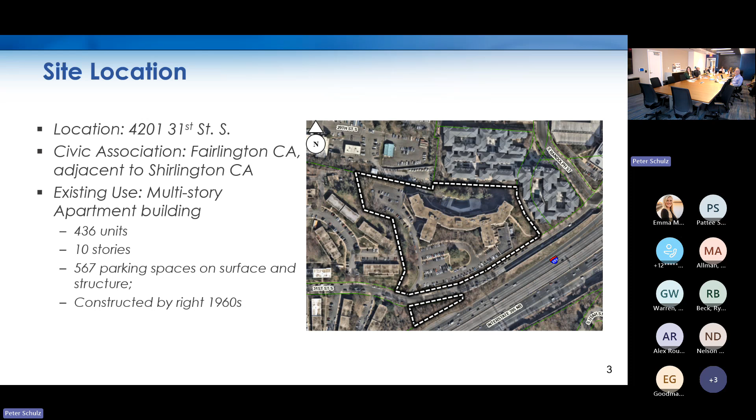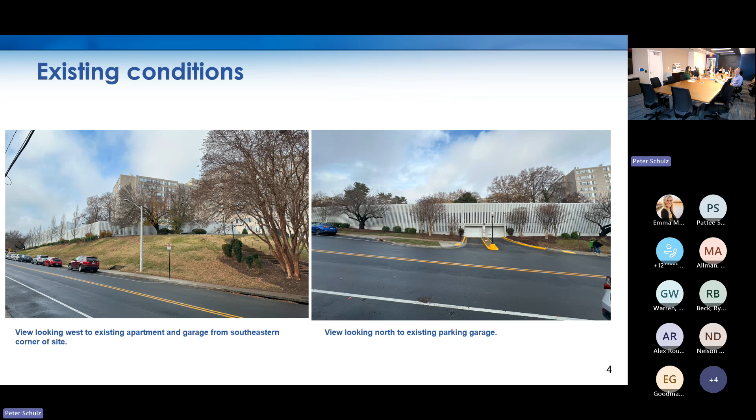Just so we're all familiar, the site location is in Shirlington. It's located in the Fairlington Civic Association boundary area, though it is neighboring the Shirlington PDSP area. It's a 10-story apartment building built around 1963 with over 400 units, so considerably sized, and it has surface and garage parking. Briefly, existing conditions show the above-ground parking garage. It was built by right, so it didn't have site plan or architectural control, or the usual amenities we expect through site plans like undergrounded utilities, wider sidewalks, and street trees.

So it met the minimum requirements for the zoning of the day and the engineering requirements. The applicant is asking for a site plan to build new units. The existing building is going to stay the same. The garage is going to stay.

The applicant wants to build one building of 59 units and 7 sort of, we're trying to figure out how to call them, duplex, 2-unit side by side, so maybe 4-plex apartments that will go in front of the garage and kind of mask the garage.

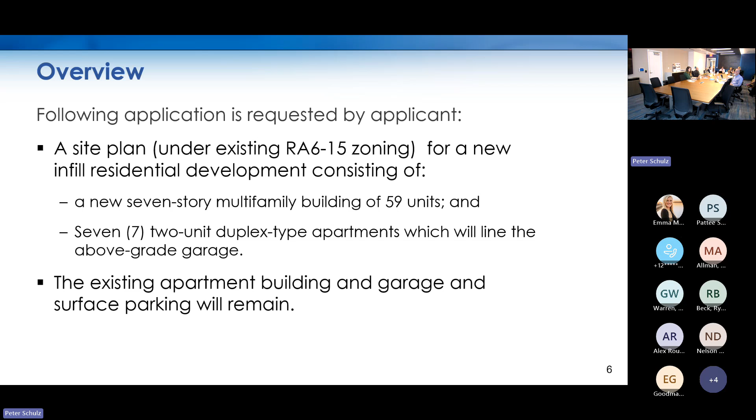The applicant will go into further detail, I will not go into huge detail about this, but it is below the zoning requirements for height. The parking actually does meet the parking requirements of the zoning ordinance, although there are more compact parking spaces than normally, that is an existing condition. So they're asking for a modification to sort of bring that existing condition up.

With a modification, we just kind of acknowledge that those compact spaces are there. Although they will, as they say, restripe some of the surface parking spaces to make more of them full-size parking spaces.

They are applying, I want the SPRC to know that the reason this is a site plan is they're applying through a provision in our zoning ordinance for on-site affordable housing and other amenities. Right now they are at their maximum density for the RA6-15 zoning district. So basically all the 73 new units are earned through the provision of on-site affordable housing and any other amenities that we might identify. Mostly it's going to be on-site affordable housing.

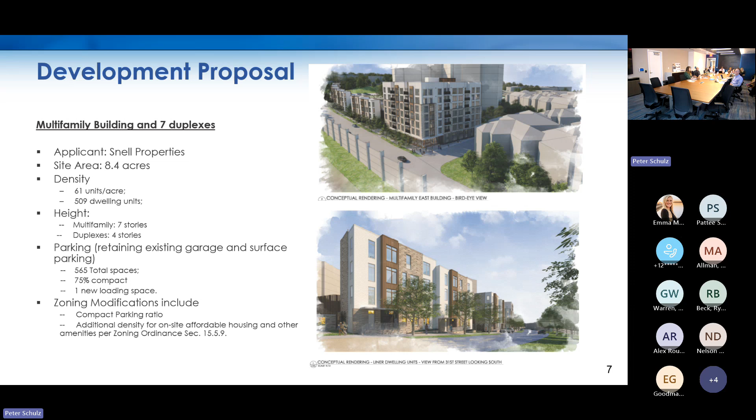The policy guidance we have here, this area is not within the Shirlington phased development site plan area, so it is not under any of the planning documents we have for Shirlington. The only really specific thing is it is within the housing conservation district.

The county board adopted a policy framework to preserve MARKs up to 80% AMI and provide committed affordable housing. The idea is also to preserve the existing and encourage infill development, while ensuring that projects are compatible to their surroundings and that new density can be supported by the transportation infrastructure and transit. It also encourages creation of underrepresented housing forms. This is a policy that the county board adopted that we will mainly be analyzing this through.

There's also the zoning regulations, the RA6-15 zoning district. That's an apartment zoning district, doesn't allow mixed use, except under extremely limited circumstances. So this is going to be purely residential development. And then there's the general land use plan, which shows our future plan for the area, and again, that's apartments.

We had online engagement, 130 respondents, including many people who sounded like existing apartment residents, though we didn't have a specific category for that, reading their comments. Most people said they didn't want to add density. They cited traffic and schools in that area, and concern about loss of street parking. As we've gone through this process, the developer and staff are working on preserving as much street parking as possible.

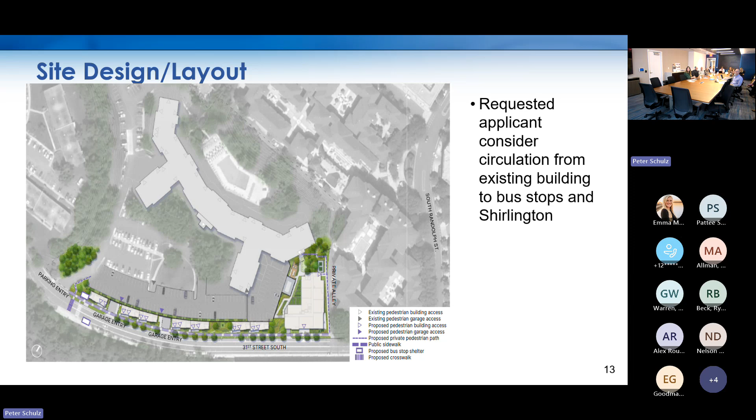Those of you who are on the walking tour saw that the 7-story building is going to be on the easternmost side of the site, closest to Shirlington. The 4-story townhouses are going to be lining the existing garage on 31st Street South. Again, they will show you most of this. The lobby is at the extreme corner of 31st Street.

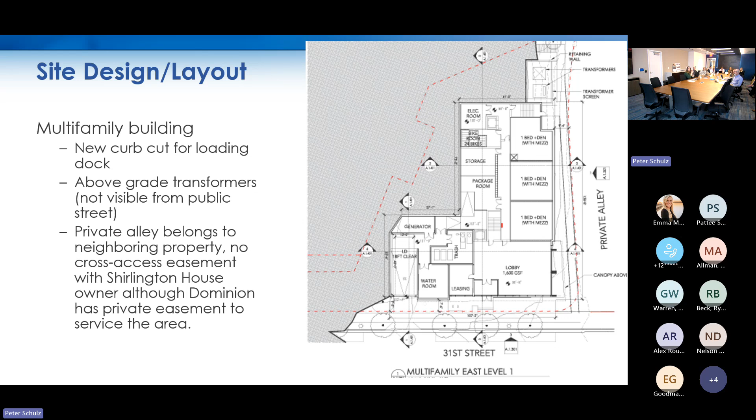In the alley, there's going to be a new loading dock for the new building that will come off of 31st Street. And here's the paired townhouses. So there's one at the far western end that's just 2 units, and these pairs are actually 4 units.

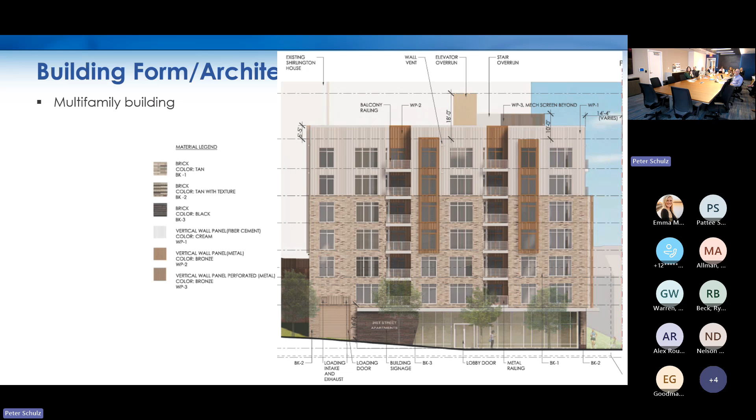And the developer will walk you through the architecture, more generally contemporary. The idea was to try to be compatible with the existing building's vocabulary of architecture. And then this is where I'm going to end. We'll talk about parking in the second half of the meeting.

Thank you. So Matt, are you giving the staff presentation? Yes. Great, thank you.

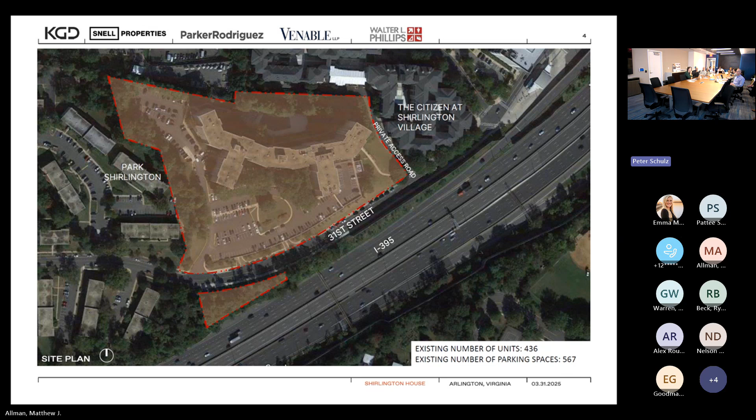Here's our rendered site plan showing how the infill units relate to the site. I'll move left to right and hit a few points, but we'll talk a lot about this entrance and this curb bump out that's proposed, which has implications for a lot of different aspects of the project. You see the liner units as you move up 31st Street, helping screen views of that garage, and then ultimately the multifamily building here at the northeast corner.

That multifamily building is 7 stories, and the liner buildings are 4 stories each. We have a slide a bit later that shows how it looks in relation to one another, because for anyone who's been out there, it's quite a slope, so not all stories are on the same level. Again, it's a 100% residential project, no retail, no commercial use.

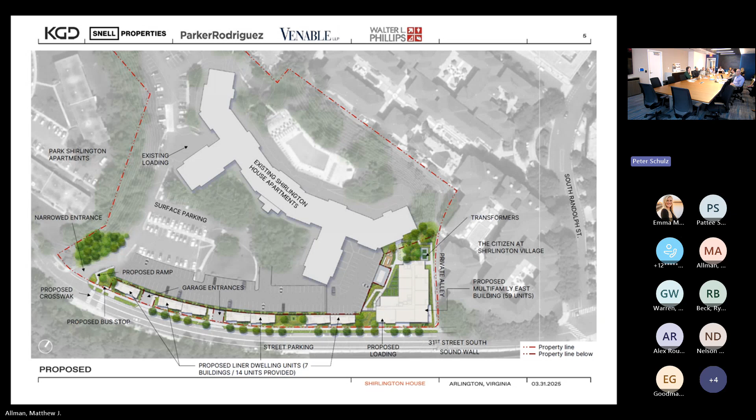This slide is more just for frame of reference for anyone who wants to come back and learn a bit more about the unit mix and sizes. I won't go through every data point, other than to call out the high number of 2 and 3 bedroom units, 13 2-bed and 18 3-bedroom units. That's something unique we're able to accomplish here with the liner units. It's a unique typology that we don't get to do in every site plan project, so it's a real benefit. It makes this project a little special and different from what we sometimes do in the commercial corridors.

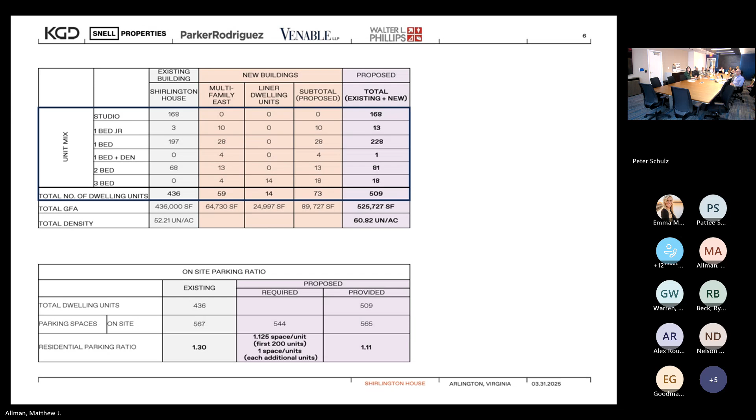In terms of parking, as Peter mentioned, we're proposing to maintain the existing garage in its current condition, just letting the new residents utilize it. The garage is so overbuilt that in the current condition and in the future condition, we still exceed the minimum by-right requirement, which is also kind of unusual. Normally we come to the SPRC and the Planning Commission asking for a reduction, but in this instance, we don't actually need one.

This is the existing site circulation pattern, and I'll again work left to right. You have a primary vehicular entrance here at the southwest corner of the site. This is where vehicles would come to get to the main entrance, or a pedestrian might walk to get up to the main entrance. This is also where trash, loading, and other service vehicles would access the site, and there's a service area tucked back up the hill behind this wing of the building.

Moving down 31st Street, there's a bus stop on either side of 31st and a crosswalk roughly in between. There are two more vehicular entrances into the garage, and they actually take you right into each one at a different level of the garage, because the slope is so extreme that this entrance is to the G1 level, and by the time you get down here, you're actually at the G2 level of the garage.

There's street parking on either side of the street. On the north side of 31st, it is not zone regulated, not metered, just open for anyone. On the south side of the street, it's metered, and the metering continues all the way up the slope, and really off the slide here, all the way up to the bus depot.

At the northeast corner of the site, there is a sidewalk that traverses from one of the secondary building access points all the way down the public sidewalk. We'll show you how that's being reconfigured in the proposed condition, coming up on the next slide. There's also a few entry points down into the garage from that upper deck level.

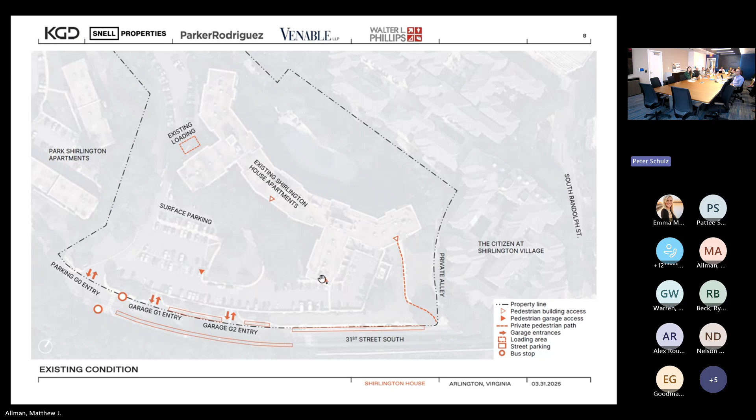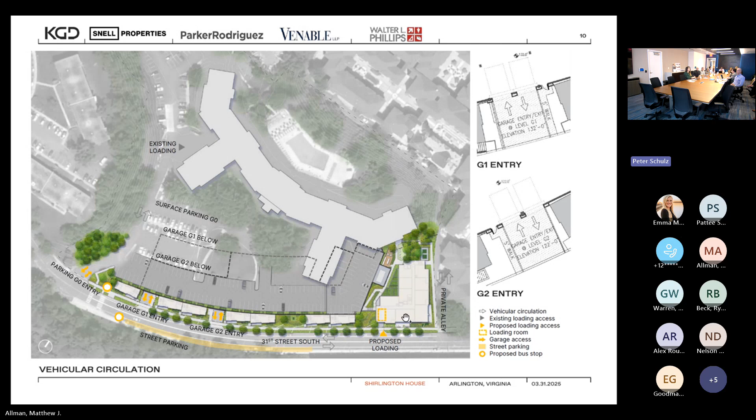This slide is busy—this is the bike circulation. The existing garage has bike rooms today, but to accommodate new tenants they need to be expanded, and in some instances we need additional bike parking. On the top side of this image, the light blue shows existing spaces, the dark blue shows the new ones, and roughly how you might get to these spaces once you're in the garage.

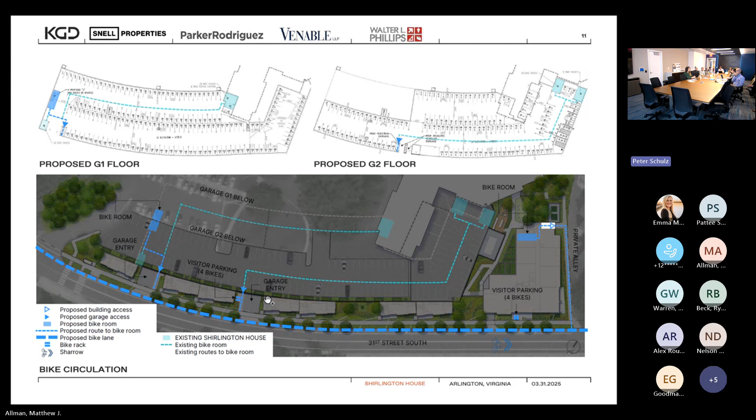On the bottom side is a little more public-facing. The thick dashed blue line is a new 5-foot bike lane that we propose to take the place of the street parking on that side of 31st Street. Then, as I mentioned, new bike entrances are co-located with the G1 and G2 vehicular entrances. We also have bike racks out in front of the buildings for visitor bike parking.

This is the existing street section. Of course, these sections vary a little depending on where you are on the site, so this is just a snapshot. You could see this is, I guess, looking southwest down 31st Street.

You have a 4-foot sidewalk, a parking lane, two travel lanes of varying but generally pretty wide width, and then another parking lane. On the other side, a 4 to 4.5-foot sidewalk, then pretty significant topography up to the garage. Depending on where you are, either a little bit of garage is exposed, or a lot of garage is exposed.

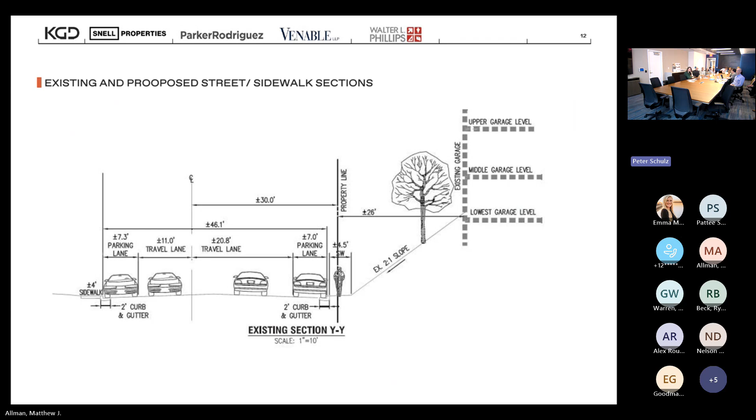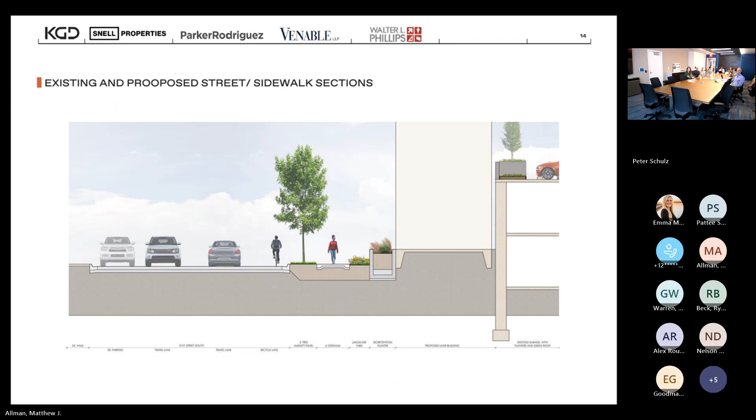A similar view here, moving a little further to the interior of the site, where you can see one of the liner units. Again, that's your 5-foot bike lane, same tree pit, standard clear sidewalk width, a little bit of a shy zone, and some bio-retention planters to help green up that transition from the sidewalk to the liner units. You can see how the liner units actually screen the garage behind it.

Last one, this is a snapshot between the 2 liner units. We have one area with a lot of existing utilities and infrastructure that couldn't be relocated without interrupting service to the main building. So the goal in these areas is to green them up, landscape them, make them look as nice as we can. You see one of those landscape pockets here.

Here's the comparative height view that I mentioned a few minutes ago. You can get a sense of how the site slopes down towards the new multifamily building. This puts the new buildings into context with the existing building in the background.

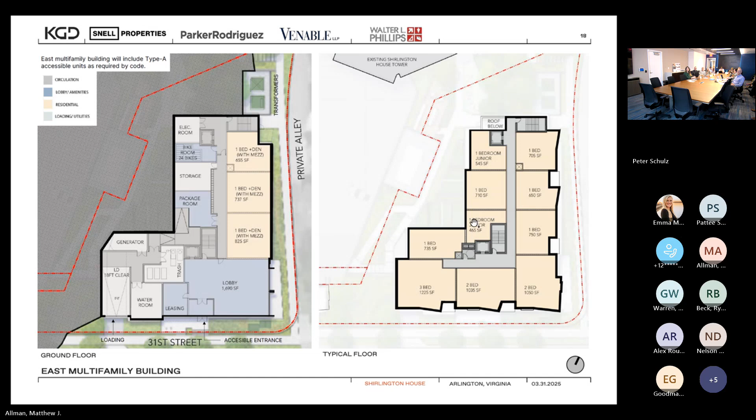The floor plan for the multifamily building. Again, you see the new loading entrance, the entrance off the sidewalk directly into the lobby. There are some residential units here on this frontage, ground floor, with also service and other back of house uses on this floor. This is more of a typical floor you would see in the multifamily building.

Here you can see the architecture. This is looking at the lobby entrance from the vantage point of 31st Street. The goal with the architecture was to employ metal paneling, cementitious materials, and brick in a warmer earth tone color palette. The goal is to complement the existing building and play off of it without directly matching it and making it too on the nose with the architecture. There's also a lot of playfulness with recessing balconies, depth, and different changes in plane.

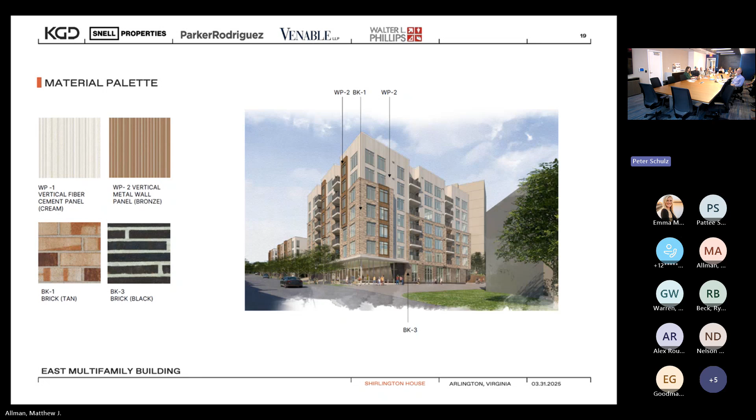Zooming in just a bit to give a sense of proportion. Roughly speaking, the units are about 16.5 feet in depth. That leaves space for about a 5-foot door yard, shy zone, and the stoop before we get to the clear sidewalk. So here's a rendering of what that might look like, to provide a little buffer so it's not right on the clear sidewalk. On the bottom, we have a few precedent images of similar development elsewhere in Arlington.

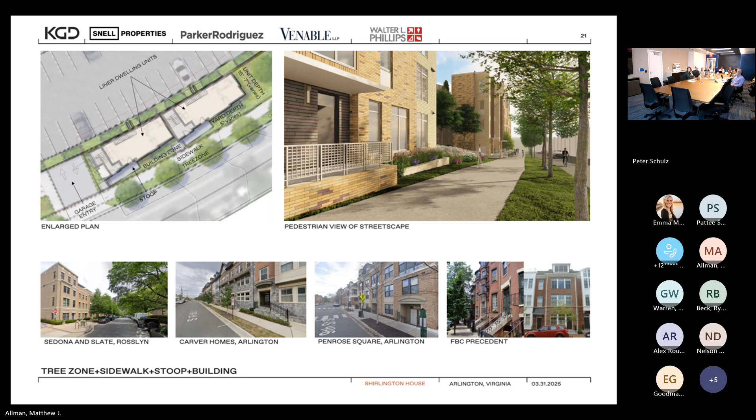The architecture of the liner buildings is pretty similar to that for the multifamily in terms of materiality and color palette. But here, there are similarly changes in depth to provide shadow effects, changes in the cornicing, just to provide a little variation and give it a townhouse feel, making it look interesting.

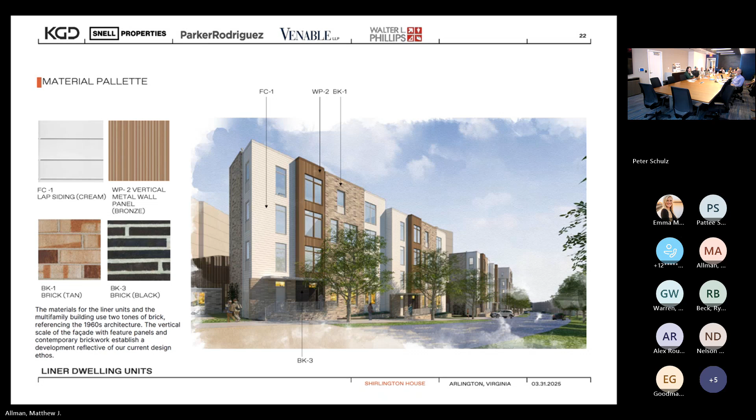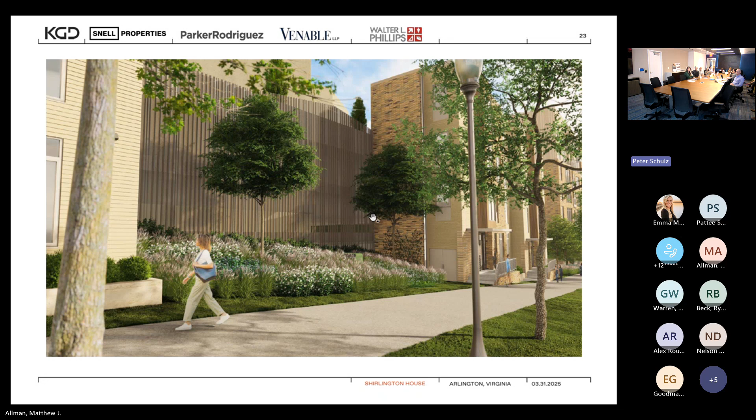And I believe that's it for part one of the presentation. So, thank you.

So before we start the discussion, are there any clarifying questions on those three topics for either staff or the applicant or both?

Okay, so I see Jennifer, you've raised your hand. Oh, go ahead. Yeah, I'm sorry, because I am taking notes.

I think what drew my attention was the narrowing of 31st Street going up and down, if I understood that correctly, but I didn't quite get the scale of it. As someone who uses that regularly, I know it's already sometimes tight when you have city buses going up and down at the same time, that you have to almost pull off to the side. So I'm trying to get a sense of how narrow that might look like.

Before Matt answers, are you talking when you're in your car? Yes. So let's say a city bus is coming down towards Shirlington, you're making your way up. It already sort of feels somewhat tight, depending on how people are parked on either side. So I'm just asking about the narrowing, what that's like. Living in Shirlington, that's a reality all the time. We have to pull off to the side because it's too narrow.

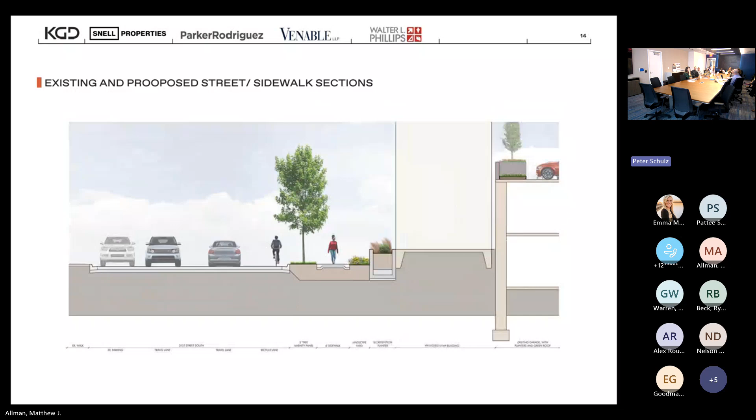Pardon me, and I will get to that slide. I do want the design team to help me out so I don't mischaracterize it. But I believe that the slopes - right, the question was about this segment of sidewalk here, and there's a new connection point to the new multifamily building as well as the existing building here. Basically, how do you get up to the existing building? Right, right. I'm looking to my design team to help me out. I know we've looked at this, and there is the new stairwell.

Say the walkway that's parallel to that alley up to the - yeah, it's just redesigned from what today was really curved. It's just going to come straight up.

And my other question is about the bike lane. Is there any protection for it, or is it just going to be a line? It's just a line, yeah.

Too bad. I'll note just globally, I think this applies to what we've seen and what we will see in the second part of the presentation - the streetscape is still a bit of a work in progress. It's changed a lot from what we filed initially, and it's not been fully engineered, fully reviewed by staff to this point. So we kind of know the direction we're heading with it, but there is still some work to be done. Thank you.

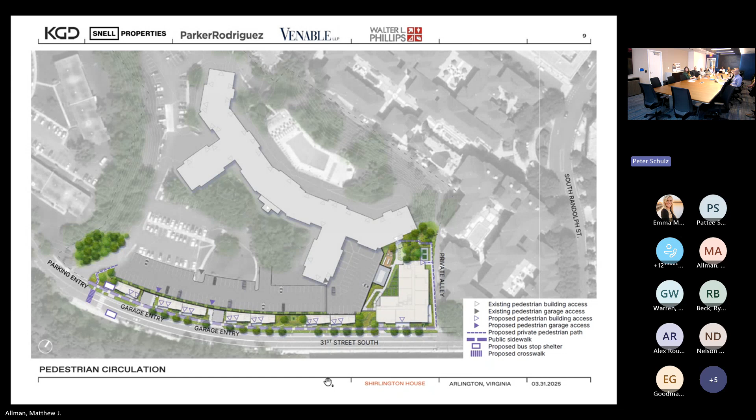I've asked Matt to pull that slide up again so you can get a better frame for this. I guess the massing, is that the correct term? There you go. So you can see the current building in behind there to give you an idea. That was the visual I needed, and then thinking further up the hill - I'm assuming the concerns raised from the Park Shirlington residents were the ones that were tucked behind the newer build, right? That was their concern, the shadows or the blocked views. Yes, I believe that's correct - blocked views. Okay, thank you.

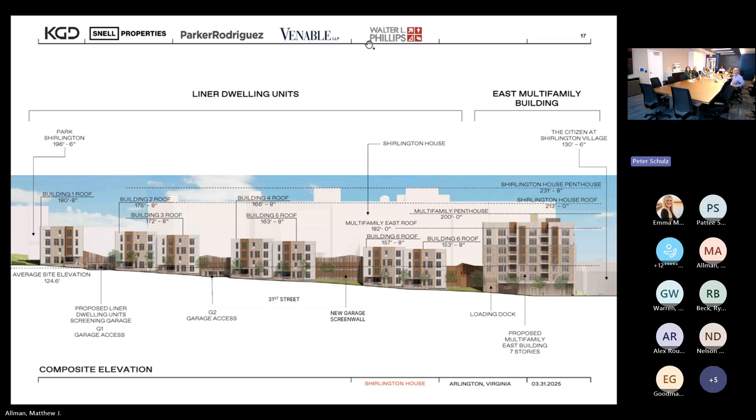I just have a couple comments, not sure where they go, but it's nice to see the 3 bedrooms, thank you for that. That's always a hard one for us to get. And you did mention the landscape pocket - hopefully that will be native. Okay, great, thank you.

All right, oh yeah Jim. For the landscape pocket, and maybe landscaping really is in the second half - it is kind of, but. I was wondering with that screen, which looks good, but could it also be a trellis that plants could climb up, to be more biophilic? Good question. I think the idea behind that, we're still relying a little bit on ventilation, so the idea was to have the landscape in front, keep the plants off.

Okay, so I guess we can move on to part 2. Does anyone need a stretch break? Get up, stand up, do anything, or do you just want to power on through? Power on through, okay, so we'll just power on through.

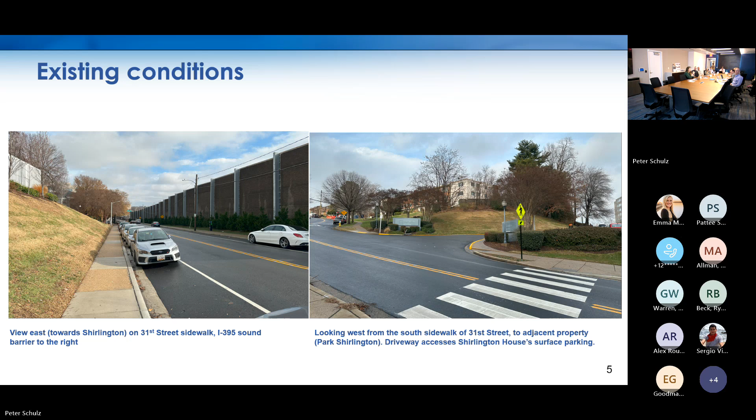Just to refresh everybody on the agenda - we're actually at the halfway point of staff presentation on items 4 through 7. I'm going to try to keep it short. Again, the applicant, feel free to take the time you need, and everybody should feel like we have sufficient discussion. We're going to pick that up with a discussion of on-site parking and transportation, open space and landscaping, and that ties in with the green building and sustainability that the developer is proposing, and site features and amenities, which comes with the site plan development, including discussion of on-site affordable housing. Then we will have public comment and then wrap up from tonight's meeting.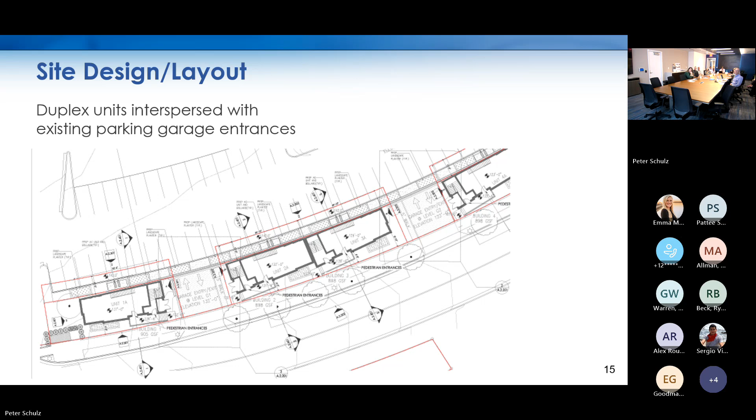All right, here we go.

There are 567 parking spaces, which actually exceeds what the zoning ordinance required even in 1963. That's over 100 spaces more than the zoning ordinance required in 1963 and requires even today. The zoning ordinance requires 1.125 parking spaces per dwelling unit for the first 200 plus 1 unit over. The upshot is that they are not adding new parking spaces.

However, even with adding 73 new dwelling units, they're still over the zoning ordinance requirement for parking spaces. I know we got feedback that there was a perceived lack of parking on the site. If it meets the zoning ordinance, as staff, we don't have the ability to ask for more. In fact, generally we try to right-size the parking to match demand, and the developer is providing what the zoning ordinance requires.

To show the site access, did you want to? Sure, yes. My colleague Sergio from DES will speak on the proposed parking plan.

The applicant proposes to retain and continue using the existing on-site garage, as Matt said, which currently serves the Shirlington House residents. Access to the garage will remain off of 31st Street South, with 1 curb cut leading to the surface lot and 2 other curb cuts leading to garage levels 1 and 2.

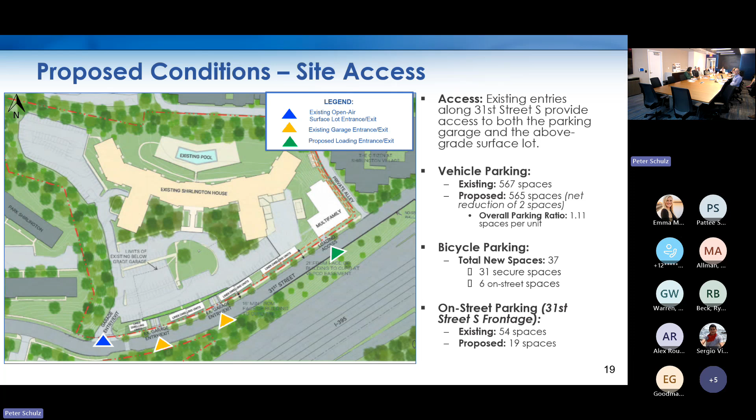During online engagement and discussions with county staff, there were strong recommendations to maximize parking supply through the design. Staff has not yet received updated plans, and the applicant will share any revisions in response to some of these comments in the next portion of the presentation. To summarize what the applicant, Matt, and Peter have said: with the new dwelling units being proposed, the parking supply will continue to meet and exceed zoning requirements, and standard transportation demand management strategies are also being applied to the site plan project.

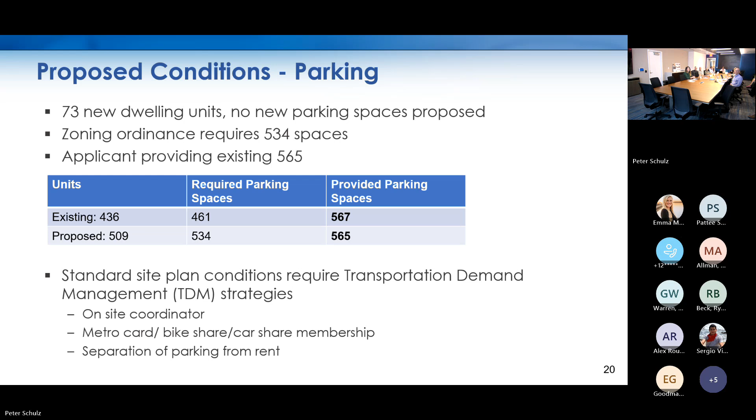In terms of 31st Street South, the applicant proposes to standardize the street width to 36 feet along the building frontages. The current width varies between 36 and 46 feet. Travel lanes are proposed to be adjusted, and some will still continue to exceed county recommended widths, depending on the final parking layout. The proposed streetscape on the north side includes a 5-foot wide landscape zone and a 6-foot wide sidewalk. Existing curb cuts to the garage are proposed to be converted to county standard driveway aprons.

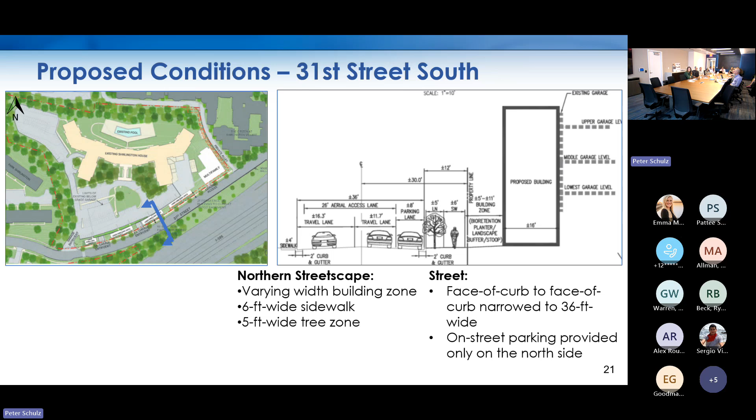Again, while official plans haven't been submitted to the county, the applicant will probably provide us a glimpse of what they've updated so far in the next presentation.

With regard to open space and landscaping, the zoning ordinance requirement is a maximum 56% lot coverage, which is the footprint of any buildings and driving surfaces—so driveways and parking. Right now, 49% lot coverage is proposed. I should note that in this application, while trees are being cut down in front of the parking garage, those are largely ornamental and non-native trees. Canopy trees that meet our county standards for resiliency and generally Virginia native plantings will be provided on this site to shade the public sidewalk.

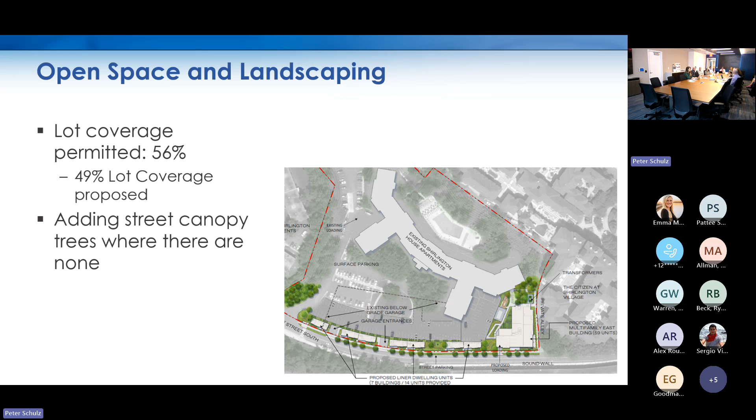And the applicant's going to show you more about the on-site landscaping.

With regard to the green building and sustainability, they are requesting bonus density at the 0.25 FAR level. What that is, we have a green building incentive program which, if they qualify at LEED Gold and get a couple of Arlington specific credits, they can earn a 0.25 FAR additional density. That's additional square footage that they need to build.

That will apply to the new building only, although staff would like the applicant to examine if there's anything they can do in the existing building. We know the existing building was built in the 60s, and we wouldn't want to disrupt residents with major things, but are there some existing things they can do to make the existing building more efficient? They currently have some electric charging stations already on site.

Generally, we do like to see EV charging stations and EV-ready parking spaces available with new developments like these.

Site features and amenities: they are asking for additional density under a provision of the zoning ordinance that requires much of that additional density to be in affordable housing, committed affordable housing on site, generally 60% of the average area median income, and affordable for a term of at least 30 years. They're also asking for LEED Gold and community priority credits, as stated before. We're still negotiating with the applicant as to how many affordable units they need to provide and what bedroom configurations. We will have that settled by the time this goes to the Housing Commission and the Planning Commission in the future.

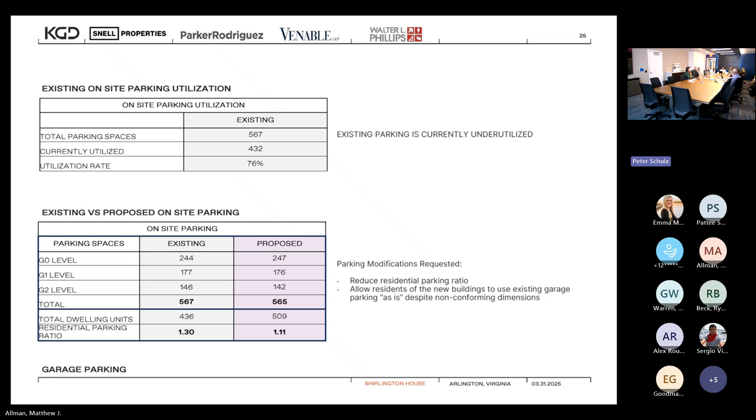That's something we see very typically in these older by-right 1960s buildings. They're just overparked. In terms of the proposal to utilize that parking for the new residents, as Peter explained, even adding the new units to the site still exceeds the minimum by-right parking requirement. So we've got a reduced parking ratio down to 1.11 in the aggregate, but it's not even so much a modification because we still have a little bit of surplus versus what's required. We are proposing a modification to utilize the existing spaces as is, even though we know that many of them don't meet 2025 requirements for dimensions and layout. That's also fairly common when we're dealing with wedging a newer development into an older existing garage, perhaps more so in Crystal City or Rosslyn, but it's something the county sees from time to time.

To shift to street parking momentarily, let's talk about where we started with the 4.1 filing, or I should say even further back, what's out there today, what we filed, and then where we are now with the current proposal, because there has been some movement on this particular aspect of the design. So currently, as you know, there's parking on either side of the street, roughly 51 spaces, touching or approximately touching the property line.

In the initial filing, the proposal was to maintain the street parking on the north side of the street and eliminate the street parking on the south side, a loss of approximately 32 spaces. What we heard clearly from staff and from comments in the online engagement and discussions with the Civic Association is that folks were wary of losing all that street parking, and asked if we could go back and look at ways to balance that out better. So that's what we've done.

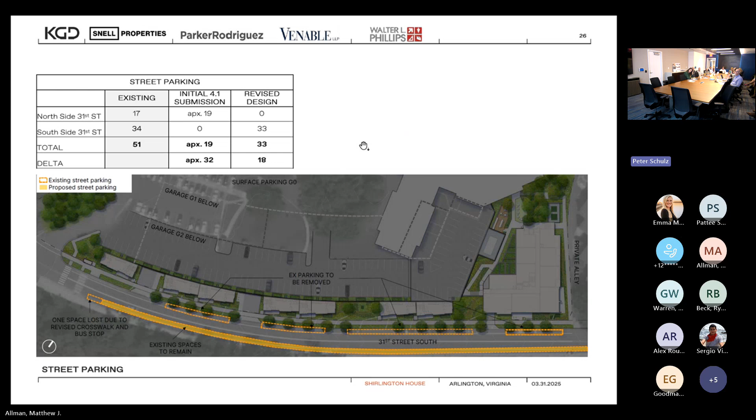We've been working on this in the background, and the current design shown here maintains the street parking on the south side, with just the removal of one space needed to accommodate the larger bus stop, but eliminates the street parking on the north side in favor of the new 5-foot bike lane. So there's still a loss, but the delta isn't as great — we're looking at losing approximately 18 spaces as opposed to approximately 32.

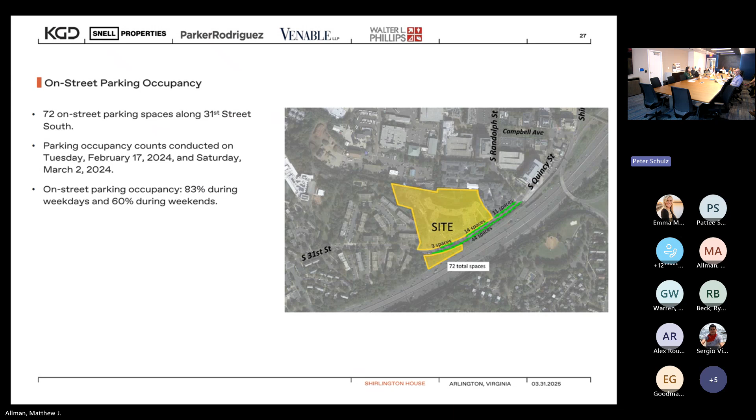We had our transportation consultant go out and do a rough survey of utilization of that street parking. They surveyed not just in front of the site, but further up the block towards the transit station, taking a slightly wider lens on the study, and found the max occupancy or utilization about 83% on a weekday, a little lower on the weekend. As you might expect, it fluctuates hourly quite a bit, and during the overnight hours when the meters aren't running is when we see the periods of highest usage.

The pedestrian network is actually fairly good in this area in terms of walkability. What's maybe a bit of a mixed bag is the actual sidewalk design and widths, which we touched on earlier, but the walk scores in this area are quite good. The bicycle network is similarly a bit of a mixed bag.

Immediately adjacent to the site, there's really no bicycle infrastructure at the moment. Bicyclists could ride on the street — in fact, I think we saw maybe one on the walking tour earlier — but there's not a lot of infrastructure there for cyclists. It's a little better once you get up into the more urbanized commercial area of Shirlington, and you can see the site is bordered by several bike share stations.

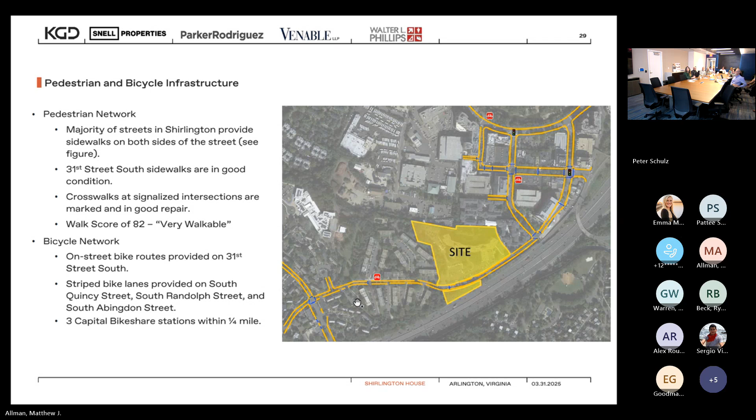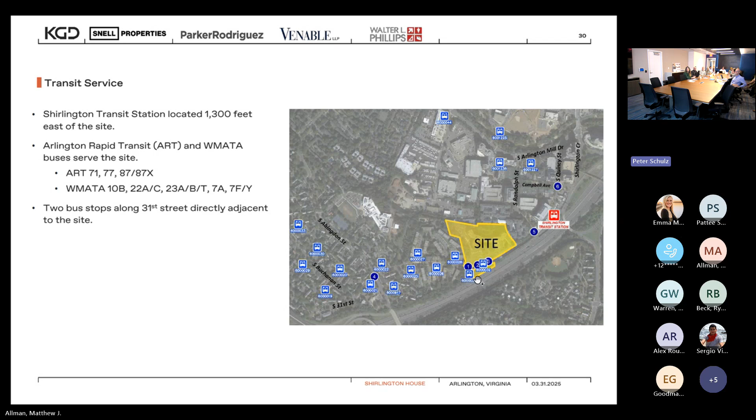In terms of transit, the site's actually very transit rich. It's only about a block or so from the Shirlington transit station, with 2 stops directly on site and many more within easy walking distance.

Our transportation team conducted a multimodal transportation assessment. We looked at 6 different intersections around the site, as shown in this slide. We found that the net add of traffic in the peak hours was 16 morning trips and 21 afternoon trips, and that the transportation network is generally adequate to service that additional demand. To further mitigate vehicular traffic impacts, as Sergio mentioned, the project will be participating in a transportation management plan.

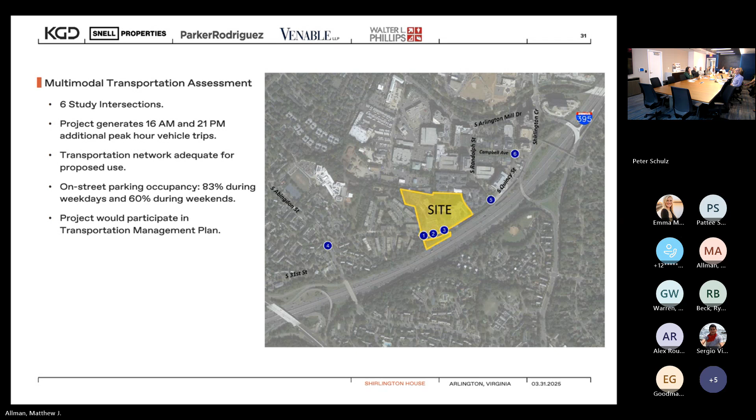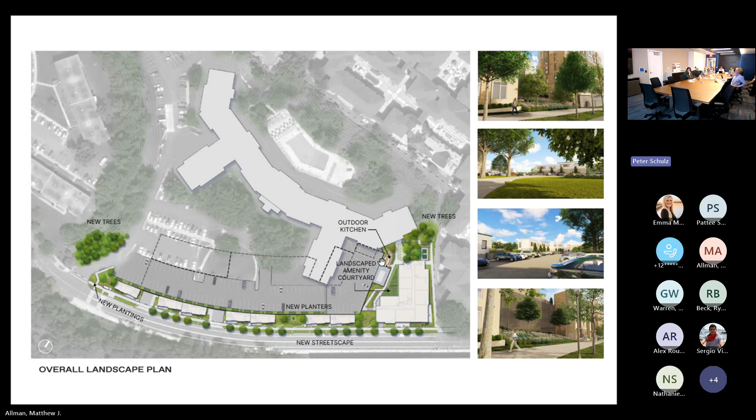The multifamily building has most of its private amenities tucked into the elbow here and behind the building, with a variety of new plantings, new amenities, and an outdoor kitchen area to serve new residents.

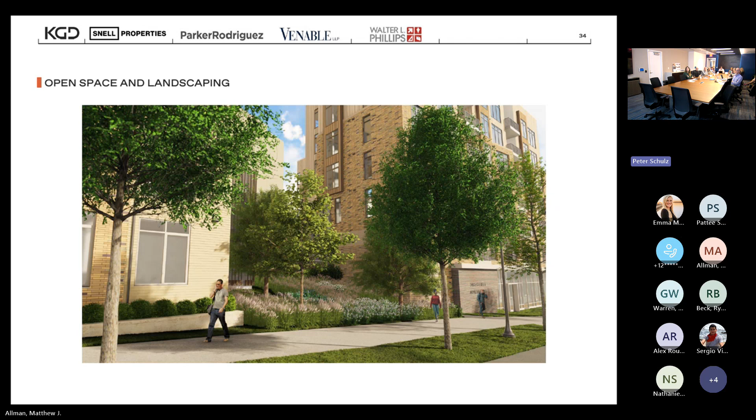This is the other landscape pocket. I showed you the other one between the liner buildings earlier, more for the screen wall purposes, but this one shows the relationship between the liner unit here and the multifamily building here. The emphasis on these pockets is to make them more lush, focus on native plantings and pollinator plants, make them look attractive, and do the best we can to screen the garage versus what's today just sort of a lawn area with minimal landscaping.

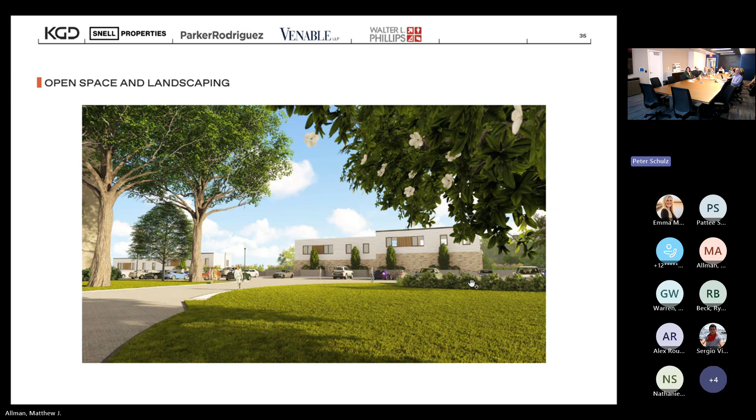This is a view now standing up on the parking deck. This is almost as if you're at the front door of the existing building looking out towards 31st Street. You can see some of the existing mature trees up on that level, and then the new planter boxes that have been popped in along the frame of the parking garage.

With some ornamental and decorative plantings to better screen those new liner units. Also a view from the top of the parking deck looking towards the liner units with that new screening added.

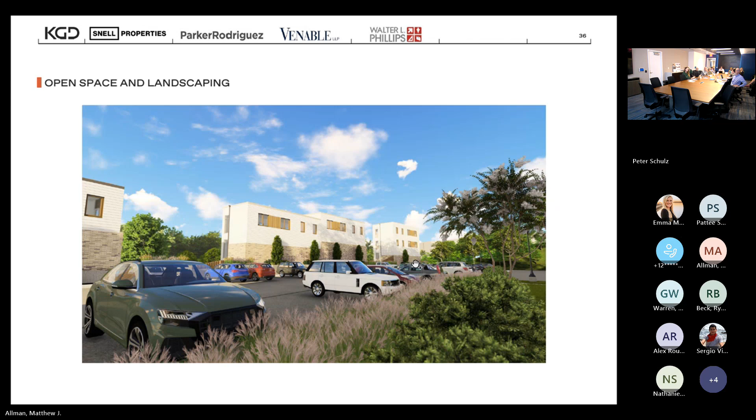In terms of green building and sustainability, as staff mentioned, this project will participate in the Green Building Incentive Program, meaning LEED Gold certification for both the multifamily building and the liner units. There are actually two different rating systems that apply because they're different product types, but both are LEED Gold. One thing we mentioned on the walking tour is looking to incorporate some noise attenuation, either through passive design or materiality, because with the proximity to the interstate, it's a little bit of a noisier part of the neighborhood.

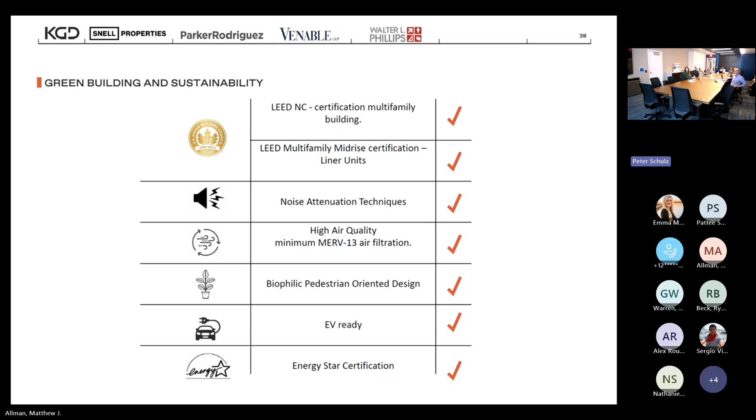Also looking at air quality filtration, some quality of life design aspects for the new building, biophilic design, pedestrian-oriented design. We talked a little bit about that with the landscape pockets and the emphasis on native plants. EV charging, absolutely, that's a requirement of the green building program, and fortunately there's already some infrastructure in place that can be leveraged and built upon. And then finally, Energy Star certification, which can consist of many things, but typically high energy efficiency appliances, high efficiency plumbing and fixtures, things like that. This is not an exhaustive list—a lot more design goes into the process as we get into these green building certifications, but this is the menu we know we're drawing upon.

Lastly, with community benefits, some of these have already been covered, but you have two buckets of benefits with these projects: standard and bonus. Standard benefits include the upgraded sidewalk with 6 foot clear, street trees, utility upgrades along 31st Street, other site upgrades around the property, contributions to the utility undergrounding fund, public art fund, the transportation management plan to help mitigate traffic impacts for those who use cars and live in the building, provision of an in-building emergency wireless network—that's something first responders require in all these new buildings—and then the upgrades to the bus stops.

The bonus density benefits, the things we're doing to really earn the density for these new buildings, include the green building certification we just discussed, and the on-site affordable dwelling units. As Peter mentioned, we don't have the final number or final mix nailed down just yet, but we know these units will be located in the new building as opposed to the old building. That's just a little quirk of the financing in place for the existing building.

Thank you all very much. I know we threw a ton of information at you this evening, but again, happy to answer your questions. And I neglected to mention, for anyone interested in the architecture, we have a materials board behind us, so maybe after the meeting if anyone wants to take a look at that.

Thank you. So on that note, before we proceed to clarifying questions, I did want to recognize Commissioner. Sure, I will introduce myself since I showed up late—I'm Eric Berkey, a member of the Planning Commission. So on that note, let's go ahead with clarifying questions, Jim. Yeah, for transportation and parking.

Thank you for the statistics on how many spaces are being utilized now. I take it that the cost of parking is separate from the cost of rent, that if you rent a unit, you have to affirmatively rent space in the parking lot. That's correct. Okay, good.

Given that people are complaining about losing spaces on 31st Street, it presumably would be people in the apartment building who don't want to pay and are trying to park out there, or in Park Shirlington, or at the Citizen, who don't want to have to pay and just want to park. So there's plenty of parking in your building that if anybody wanted it, they could get it immediately.

They could get two, they could get three. That's correct. Okay, so I'm not as concerned about losing spaces on 31st Street as before, because there is parking available, and county policy is you have to pay for parking. Parking on the street isn't a right. I don't have a problem with losing spaces along 31st Street.

All right, unless there's any other questions on that, green building and—oh, I'm sorry, Pam. I'll put it under landscape because I don't know where to put it. Can you pull up one of your slides that shows the parking lot with the landscaping and the back of the liner building? Yes, give me a moment, there's 2 slides.

I was surprised when I saw these slides online that the liner buildings are so tall. I had no idea they would be this far above the parking lot. If you're going to keep them this way, can you please make them more attractive and greener? I have a suggestion, which I'm sure you will probably ignore: if you want to lower them, make the first floor of the liner buildings 1 floor. They could be fully accessible, which you can't do with 2 floors, which would be really attractive to people. And people on the 2nd floor would only have to go up 1 floor to get into their apartment. You would improve the view a lot. So that's just my suggestion. But if you're going to keep it this way, please make it more interesting, greener, and more attractive—maybe a green roof with plants around it. It doesn't look very well. Thank you.

Dan, is there anything you want to add about the vision for the landscape boxes along the back of the parking lot? I know this is just somewhat conceptual to show you what we're thinking, but certainly not a finished product. Yeah, we looked at doing things like trees.

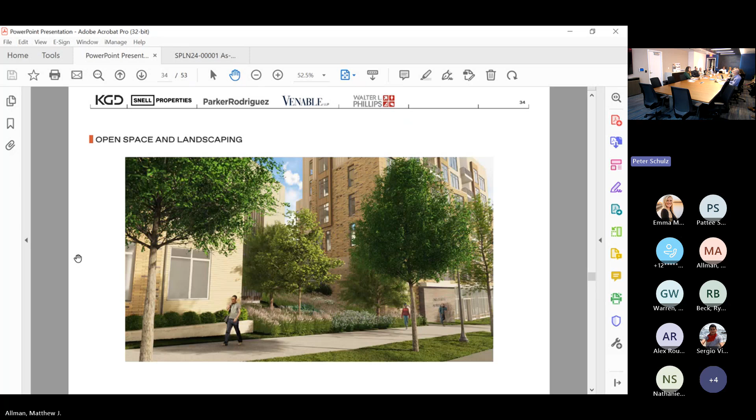Just to follow up on your point about the deck, have you looked at soil volume requirements for native understory trees like redbuds and azaleas, where you don't need that much soil and you still get the height to screen the back of the liner units a little better?

Yeah, a lot of even the small trees, like 300 cubic feet, would like to have more soil. These are small enough we're not counting them towards any kind of credits, they're really more like planters. We're trying to get as much as we can without overburdening the existing garage. The existing garage is wider, the parking spaces are wider, so we're able to narrow that space in front of the cars. We worked with the architects and the design team to fit as much as we could in there.

Yeah, understory trees, to your point about the shade buildings, they're understory trees. They're supposed to grow under the canopy so they don't have the sun requirements that bigger trees have, so I think they'd do just fine. There's probably a dozen species you could look at, and they certainly don't need the volume that a canopy tree needs.

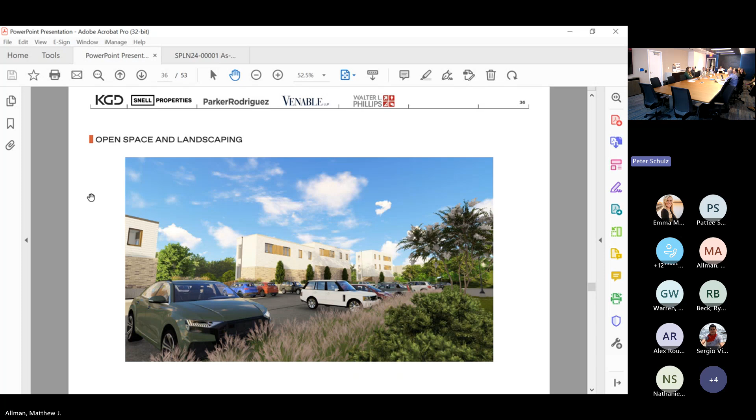That's a good point. Even if we can't count them technically, I think it's a good approach. There's not a lot of soil volume, and we'd get comments on our landscape plans when we tried to count them. Well, they'll count to the residents. That's exactly what I was going to follow up on.

So, Jennifer, you had a comment or question? I just had a question, I don't know if this is the right place. Is there existing lighting for pedestrian safety to get from the vehicles to the residences, and how would that work? If there isn't, that's fine, but I was trying to think about the balance between lighting for safety versus lighting that might be intrusive on any of the new units being developed. This has come up in the Park Shirlington redevelopment, that's why I'm asking.

There is existing site lighting up there, though I couldn't tell you much about its characteristics. We can certainly take a look at that. Okay, I guess if there's a new unit going up, would the lights go into their living room from that second duplex story? That would be a question I have. Yeah, it's a good question. I think the lighting today is in the center of the parking lot, so it's a little ways away from where the new units are proposed, but it's certainly something that bears looking at.